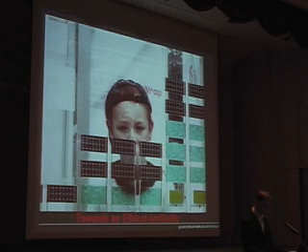Steve Kieran and I call this 'Toward an Ethical Aesthetic of Architecture,' partly because for the last 21 years, since 1984, since we've been in practice, we've been trying to find a way to work, a method of working, and a product from our work that we believe is deeply rooted in a kind of ethic. That ethic, I hope, will become clearer as you see the work.

We wrote an essay about it in the recent World Architecture, copies of which have been sent to a number of places, and it's published in China, so it's not readily available here. It is in English, not just in Mandarin. I think we may have sent a copy to your library here, and if we haven't, we will do so.

We talk a little bit about what an ethical aesthetic is in that essay and in the monograph on our work. About 4 years ago, we published a book called Manual, The Architecture of KieranTimberlake - I don't know if it's in your library - and it chronicles the first 15 years of our work, the process of that work, and the aesthetic that came from that process.

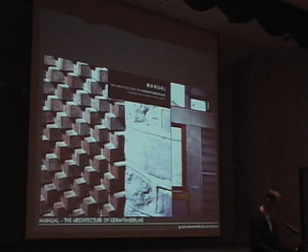We wrote it for all of you; we didn't write it for us. While there are, we think, wonderful pictures in it, it's not a big glossy book. It really talks about our process, and our process with clients and with our consultants, that allowed us to do the kinds of details and designs that are chronicled in that book.

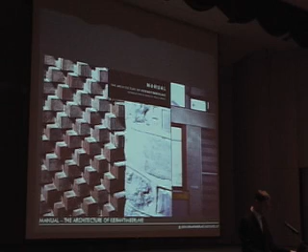There's an essay by Alberto Perez Gomez in there that we were very grateful for, and I think he talks about our craft aesthetic in there. So I was flattered to follow that little short video clip at the beginning that talks about using your hand and your mind and your eye, that you are a craftsman and then an artist.

I thought it was quite compelling. Some of our early work that's in that book, Manual, are just shown here. I'll just briefly flip through these. This is a project from 1987 done in the undercroft of a Catholic women's college, a little student center project,

a renovation. And one of the things that we tried to do when we were a small firm, we're now 54 people, when we were just Steve and me and a few other people practicing, was always look, when we got a commission, for an opportunity in that commission. It isn't always readily present to you in the commission or in what the client hands to you, particularly at that scale and at that level of aspiration of client.

But what we try to do is find an idea, find an opportunity, find a way of working and thinking that can be expressed in the work. And as we worked through different scales of projects, this was our largest project up through about 1992, a science building at Rider University in New Jersey. We always tried to bring a kind of promise of an idea and a methodology of working to these particular projects. This little pool addition to an old chicken coop that was renovated into a house in Chestnut Hill, Pennsylvania.

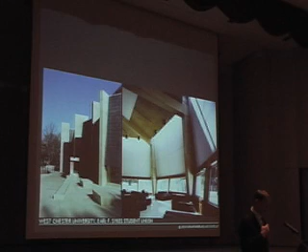And by this particular time in our career, at about the 10-year mark, we had done at least one of every kind of basic structural system, tried a variety of materialities, really looked for ways of bringing natural light and these materials together in our spaces, and used each of these projects as experiments for ourselves while trying to meet the client's objectives.

This little middle school, actually lower school gymnasium, the pods, the little window boxes on the side of the gymnasium. I don't have an interior view here, but they provide these little places of respite for lower school children, these places that are intimately scaled. They only come up to about my neck, and they're only about this wide. So two kids can kind of crawl in there and call that cubby their own without really feeling as though an adult would violate that space.

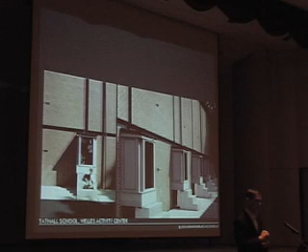And then, of course, they occupy the inside and the outside. The steps are out on the playground. So, again, they're sort of child-sized, a place that formally allows them to perch while people are occupying the playground.

A recently completed project at the University of Pennsylvania that has been, I think, widely published and you may be aware of. As we have moved throughout the next 5 to 10 years of our work, I think one of the things that we have been very interested in, and I know that Dan asked me about this, is really the idea of integrated component assemblies and the idea that you can take systems and combine them in unusual ways and really begin to have walls become mechanical systems, and lights and mechanical systems and electrical services and walls all become integrated and potentially built even on site.

In this particular case at the University of Pennsylvania, this was the first active curtain wall in the United States, a triple glazed wall with an interior chamber that is actually attached to the mechanical system of the building. Air is drawn through this wall and it becomes a tempering barrier to the outside. It also allows us to make for a much more transparent building.

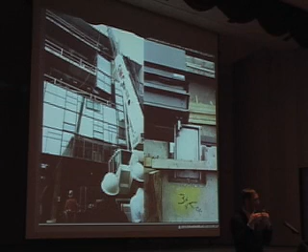And if they enter those three chambers, to the right-hand side of the unit, there's a vertical channel that allows the water to get out of those chambers. And it just allows for abundant natural light, and it allows for a very transparent structure to the outside. And of course, we're very proud of this building because of its environmental characteristics and its environmental responsibility.

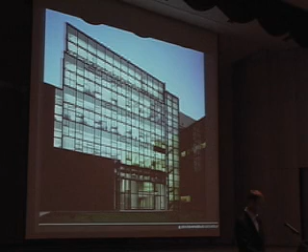This view you can't see anymore. It's now been blocked by a building designed by Todd Williams and Billie Tsien, which is under construction, and they will face one another across a courtyard. Another project that represents a tangible example of the amount of research that we do in our office. This is called SmartWrap.

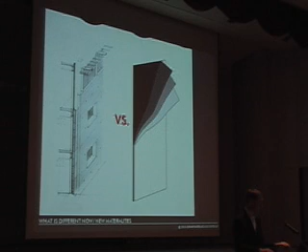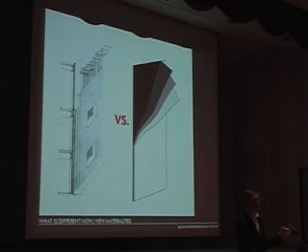This was a view of the installation at the very first Solos exhibit at the Cooper Hewitt National Design Museum in New York. And this was a speculation on the building envelope of the future. The idea that perhaps we can take an R15 wall, conventionally built out of block and steel and brick and an air chamber and insulation, and with looking at new materials, thin that up in a membrane that might have printed technologies on it that is eminently flexible, eminently replaceable, and eminently mass customizable.

And so this pavilion was a demonstration project of those first prototypes. You're looking at SmartWrap, printed wrap up above, the different colors representing the different materials on the wrap. And then this view of my son, who was then 5, looking through the wall, looking past the photovoltaics, which are the dark rectangles, the thin film batteries, which are the light green rectangles, and the OLEDs, the organic light emitting displays, which are the yellow panels.

But if you just close your eyes for a moment, and you imagine a wall all out of OLED, in other words, a wall that looks like that screen right there, it enables you to put an image up on the wall, allows me to plug my computer into that wall, and rather than going through that projector, it allows me to put the image up on that wall directly. Just like your cell phone, that little 2x2 lighted screen on your cell phone is an organic light emitting display. It emits light, emits color, emits information that comes through digitally.

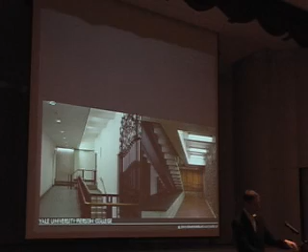You'll see the sister college in a little while called Davenport College, which is on the opposite side wall of this stairwell wall that you see on the left-hand side. The 2 colleges literally kiss one another. We renovated both and punctured that wall so you can see students moving through the 2 colleges differentially. How do we get to this level of craft? How do we pull it off in this day and age?

Well, there's a big difference, as you might imagine, between intention and realization. And this is something that you're not going to learn in architecture school. You're going to learn this when you get out into the world of practice. And not everything that you draw gets built. We were just talking about this before I began the lecture, about how buildings get executed with multiple committees and different kinds of input. And then you have to also get it constructed.

You have to work with a contractor or a CM. And those CMs and their subcontractors, hundreds if not thousands of people, are being asked to interpret the drawings that are on the left-hand side of this image into the reality that's on the right.

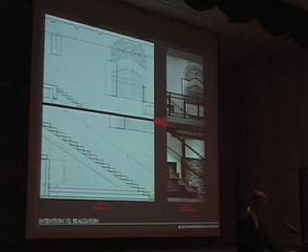And how do we get from one to the other? Well, it's a very, very arduous process, as you can imagine. And one of the things that we've tried to do is understand how one fails in this process so that you can understand how you can succeed.

Whereas in a highly controlled environment like all other non-farm industries, there's a great deal of control. They're highly productive and they get a great deal of results from them.

One other way that we're losing control of our projects is just compare these two projects right here. That science building I showed a little bit earlier, built in 1992, and a building that we renovated at Princeton University called Little Hall, that was originally built in 1899 and 1902, respectively. And just look at the building systems. Many of you are going through a building systems project right now in your studios.

Look at the building systems in 1899 and 1902 that Cope and Stewardson, the architects from Philadelphia, had to work with in that building. Basically, the HVAC system was open your window. The heating system was put a log in the fireplace. And the bathrooms didn't exist. You went down the stairs, you went outside to an outhouse that was adjacent to the residence hall. So only about 5% of the fabric of that structure had any kind of systems within it.

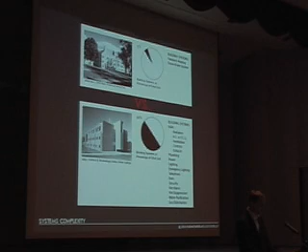So one of the concerns that we have with that is that we need to gain control of it. We need to know and understand those systems and really know and understand how those systems come together and really have a better understanding as designers and architects about those systems and what they mean.

The contract, the Personal Architectural Services of Frank Lloyd Wright, says, the architect undertakes to itemize millwork and material for the building, lets contracts for piecework, and eliminates the general contractor, where possible, by sending a qualified apprentice of the fellowship at the proper time to take charge, do the necessary shopping, and hold the whole building operation together, checking costs, layouts, etc., and endeavor to bring the work to a successful completion.

Now compare that with the AIA contract, our national professional entity that I am a fellow of. Item 2.6.6 says in the contract, the architect shall not have control. It says it in black and white, shall not have control over or charge of, and shall not be responsible for construction means, methods, techniques, sequences, or procedures, or for safety precautions.

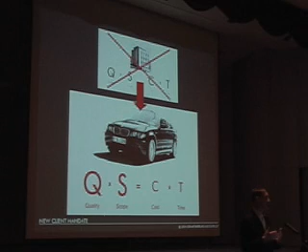It's the automobile industry and several other industries over the last decade that we chronicle in Refabricating Architecture that have really looked to an imbalanced equation here. Improving quality and increasing the amount of scope in automobiles and ships and in planes and places like that, while maintaining cost and time in the making of the product going forward. We're finding that our clients, our architecture clients, are demanding that of us as well. And so we've got even greater pressures on ourselves in terms of how we're making our work.

We have old and new legal structures, ones that cut the architect out of direct conversation between the client and the contractor, where the new models are really more linear and more seamless. So how do we get to where we want to be? Well, one of the first things that you'll do when you go into practice is really think about how you want to design your own culture.

But further, one of the things that we've been working on through our research efforts is really to think about the 4 principles. And these are taken from a variety of places. Kind of kaizen, the Japanese principle of continuous improvement. To plan, then to do or to make, to monitor what you do, and then to learn from what you do, and to continue that cycle.

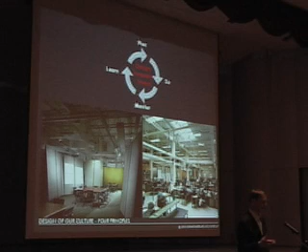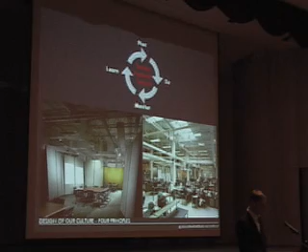And while you're doing that, to continue to design and innovate and invent while we make these things. And there's some risk involved in that, but the risk is managed through the monitoring and the learning in the process of planning and doing. We also collaborate. We also feel we have a responsibility to collaborate. In Refabricating Architecture, we talk about why we think the world of architecture is in the place that it is right at the moment.

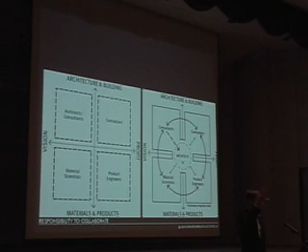The left-hand diagram here shows the separated worlds that we're currently working in. Contractors in one quadrant, architects and consultants in another, material scientists and product engineers in another, rarely collaborating, rarely speaking to one another. The world we envision is the one on the right, where architects move back to that center of control, like Brunelleschi, where they've got deep control over the process of making things,

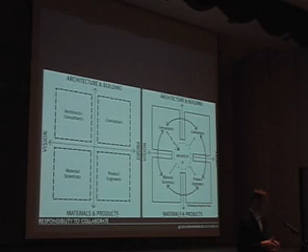the integration of systems and materials, and the consultants in the design process, so that those 50% of the systems that are in your building that aren't pure architecture design, but come from HVAC, come from MEP systems and structural systems and data and power and all those other things that we can make architecture out of, are now back in the control of what we make.

Furthermore, we've tried to practice these kinds of collaborations. In the upper left, we collaborated with Skanska and a number of other people, DuPont and ILC Dover, the maker of NASA spacesuits, on the making of the Smart Wrap project.

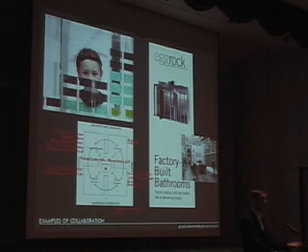We worked with a company called EggRock to make factory-built bathrooms, the prototype of which went into a project at Cornell University. And we've continually asked ourselves how to work on each and every project and redesign the collaborative model for each and every project as we move forward.

What that allows us to have is we're not master builders any longer, but we have master control. We have thousands of bits that go into projects, and we have lots of drawings that we have to do. We have lots of things that we have to coordinate, and we can't have singular control over them. We have to use collective intelligence in the making of our buildings, and that's how all of these bits and all of these pieces come together into something that we can be satisfied with when we're through with the process.

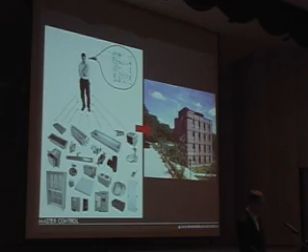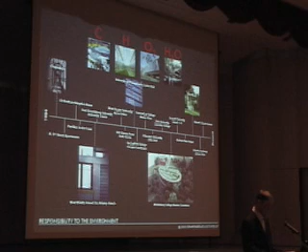And while we're doing that, one of the things that we need to do is be environmentally ethical. We need to be thinking about how our buildings come from the earth and how they're going to return to the earth, and to keep that in mind. And that's been a principle of our practice for the last 21 years.

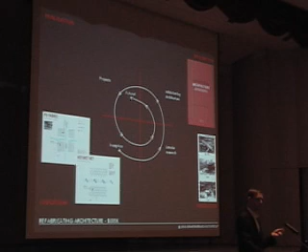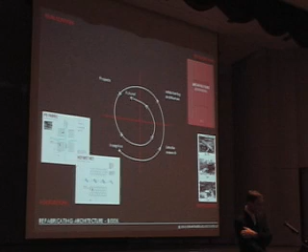The grid in the middle shows the 4 quadrants: realization, recognition, specialization, and education. Where does the project inception of something like Refabricating Architecture, our book, begin? It began in the education quadrant, because Steve Kieran and I teach at the University of Pennsylvania — we also taught at Michigan and other places. Out of those design research laboratories we've led, we started thinking about different ways of building and making things, which caused us to get grant money through the Latrobe Fellowship, a research grant through the American Institute of Architects. That instigated us to write a book, realize that book, and bring it back into the world of teaching and publication.

As you flip through the rest of these, the prefabricated bathroom models — off-site fabricated integrated component assemblies — really began from a discussion about integrated component assemblies on a very small scale, at a talk and a lecture, going through some speculation on whether we could pull off these assemblies and off-site produced modules. That led to getting hired by DuPont to actually prototype using some of their materials, some vanities and bathrooms, and then taking it through recognition and back into realization, such that these vanities are now in 4 different projects at Yale University, and off-site produced bathroom modules, plus one prototype up at Cornell University in their projects.

Off-site produced residential modules were built at Yale University. Again, the track looks a little like a hurricane track through the Gulf, beginning with a provocation by a client — the realization that they needed 32 new beds on a landlocked site in a courtyard at Yale. How were we going to build there? We couldn't get conventional constructors onto that site without airlifting material in, and they didn't have time to get it done. So we speculated on how they might do that.

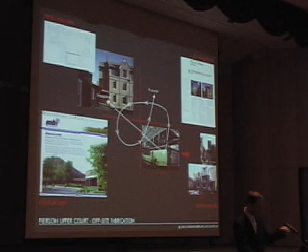We brought that out publicly. We educated ourselves and others in the process, and then it takes on other kinds of tracks — building information modeling. We're currently using Revit in our office, a building information modeling system, the next level beyond AutoCAD, the 2-dimensional drawing system.

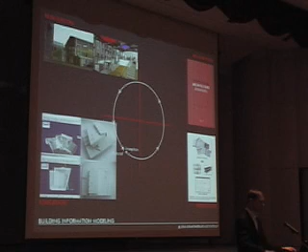We're using Gehry Technologies' Digital Project, and we use a variety of other modeling software to look at things three-dimensionally, like Rhino, Form Z, and 3D Studio Viz. We also have a three-dimensional printer in our office that allows us to print models in real time, so we can utilize those in the design process with our clients.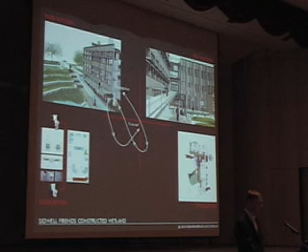Researching systems such as constructed wetlands for a middle school down in Washington, D.C. The Levine Hall active curtain wall project — again, a different kind of track of research and speculation. And then, of course, the SmartWrap project, where it begins and where it ends. These are the kinds of things that really cause us to ask ourselves questions about each and every project that comes in, set ideas and goals for those projects, and then try to track them as we move through those individual projects.

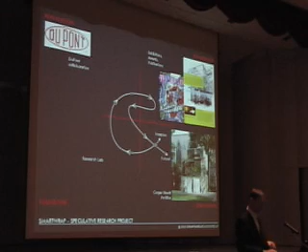And then, of course, the Loblolly House, which I'm going to show you here. It's one of the 4 projects that we feel are really beginning to change the boundaries of how not only we're thinking, but how we hope others will think. This is a completely off-site produced house. It's 2,500 square feet, for a house in Maryland. It overlooks the Chesapeake and sits amongst tall loblolly pines — very, very tall, thin pines with a kind of canopy at the top.

It sits in a wetland because it's very near the shoreline of the Chesapeake, so it has to be up on stilts. What you see in the left-hand plan is a diagram of pilings where the cars can pull underneath the platform, which pushes the building up on stilts.

You enter through a walkway over a constructed impluvium that runs through the house. You walk across that walkway and up the stair on the right-hand side of the plan, arriving at the first level above grade, which is actually a master bedroom and a child's bedroom, separated by that impluvium.

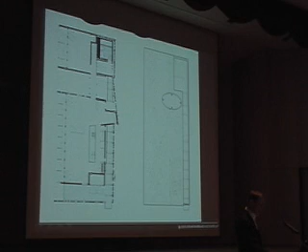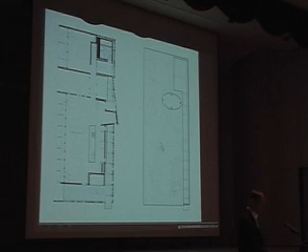You come up the stairs, enter, and get into the bedrooms through the portal, or continue up a stair that takes you to the next level, onto the living room, dining, kitchen level, with another study and bath on the upper level. There's a green roof on top of the house, which I'll talk about in a minute.

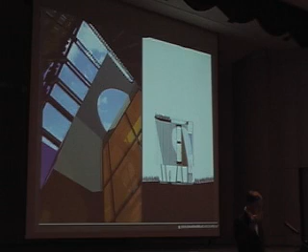This is a view of those pilings as you enter the house, coming under the cover of the house overhead, up through the stairwell, past the impluvium, open to the sky. A view through that impluvium, that rainwater capture point in the house, is part of the sustainability agenda of that house.

A view from one of the bedrooms, looking out through a triple-glazed wall, part of which is a NanaWall system that opens out to the Chesapeake with screening windows and storms, so it can be buttoned up during the winter. It'll have expansive views to the south and to the east.

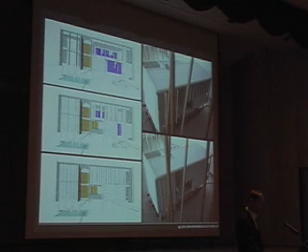These are three views on the left-hand side showing three-dimensional models done in Revit, which integrate all the components in one drawing of that house, showing the systems opening and closing. And two of the models were sent to a 3D printer, again with the systems open and closed on the site.

Now this is where I want to spend a little time. This is an exploded view of all the components in that house, and all of them are off-site constructed. The only thing we're building on the site—we have to bring a pile driver on a barge, float it in, and drive the piles on site—is really the only way we're touching that site.

The road already exists, but we wanted to disturb those sites as little as possible, so all the rest of this material is going to get trucked or barged to the site. The frame is a Bosch Rexroth extruded aluminum frame, like you saw in the SmartWrap Pavilion in New York—that's this piece at the core of the diagram in the center.

The floor systems are custom-designed cartridges which include mechanical, data, and electrical systems in a wood structure, being built by Bensonwood. The wall systems are also being built by them, and the exterior window systems on either side are being provided by yet another supplier.

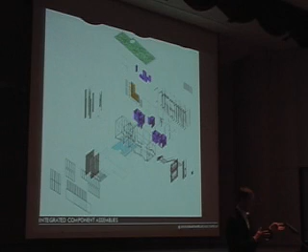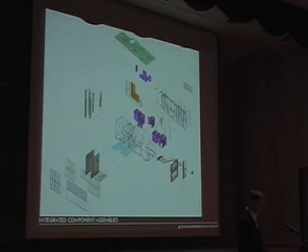The green roof is being grown off site in trays—which Frank Lloyd Wright actually did copper trays for at Fallingwater. These are coming in PET trays grown off site and then lifted onto the roof. All of these systems come together in about 3.5 weeks over the course of a month in June.

And this is ultimately a view from the Chesapeake that you'll see of that particular house.

One of the things we believe, both in integrating component assemblies and in off-site producing work, is really to try and figure out a way to get an environmentally ethical architecture where we touch the site a little less stridently than when we're building on site for 16 to 18 months, while also being able to control the waste streams in the product delivery methodologies of building.

Because by doing it in a manufacturing setting, we're not just throwing that stuff in a dumpster. Nearly 25 to 35% of all brand new materials that come to a new construction site end up in a waste stream in a dumpster on a project. Architecture is immensely wasteful, folks, and we need to do something about that. We think one of the ways we can do that is by designing a system and a way of working with contractors by building a system.

We've actually tracked through this whole supply chain to this particular house and who the assemblers are, and how that's all going to come together, logistically working with them on scheduling so that these things come in real time and just-in-time delivery, so nobody's sitting around waiting. It'll come together like we expect a car to come together.

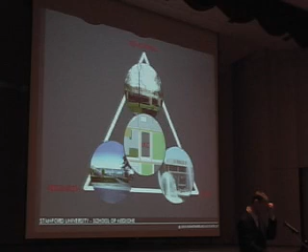The next project is one we recently completed that we very much hope will be a commission of ours, at Stanford University for the School of Medicine. Oftentimes the program brief a client gives you looks a little bit like this. This is our diagram, our interpretation of their program.

Basically, what the dean of the School of Medicine asked us to do was look at how medicine can translate, he used that word, the ability to understand medicine from the education process, from their research process, and from their care process, all through the aegis of redesigning an educational system that was going to be manifested in a new building on the Stanford University landscape.

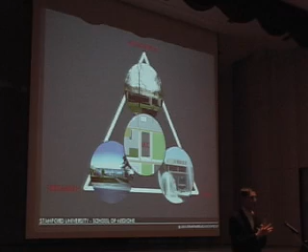That whole idea of translational learning or translational knowledge is really about inverting the process of how we learn—basically turning a building inside out. It's not housing students in opaque rooms and closeting them away, but in this case getting paths of travel from the hospital, from the School of Medicine, from the research elements, all crossing paths with one another through a kind of core element, a building they wanted to put on the campus. Now the campus, if anybody's been to Stanford, is quite beautiful. It's in Palo Alto, California.

It was loosely based upon, I think, Corbusier's Venice Hospital proposal—a series of interconnected walkways and courtyards gridded out in a Cartesian way, with open and closed spaces all interconnected visually by a system of walkways. That was again a loose interpretation of that inner quad diagram, if you track it back, sort of Durell Stone's idea about how the inner quad was really made up.

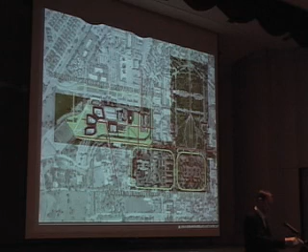And then a brand new building by Norman Foster, right here, which is actually a kind of precursor to what we think the Learning Knowledge Center ought to be—it brings the landscape directly in from the outside, into that hourglass-shaped courtyard, which you can't see very well in the diagram, but brings it inside, turning the building transparently inside out. So the inside is very transparent while the outside retains all of Stanford's terracotta and sandstone coloration.

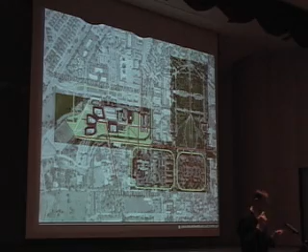So our initial speculations on this really looked at how we might introduce a relationship between landscape, inside, and outside, and explored ways of organizing the building through a series of flat plates and trays.

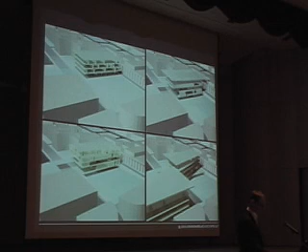And these are four examples, four options that we showed in an initial meeting with them: a series of flat plates and trays with kind of mutable, changeable inside walls that reach out, back out into the landscape and connect inside and outside through great deals of transparency, abundant natural light, and other shading devices.

In order to convince them during the presentation phase of this that we knew Stanford University and we understood the kind of characteristics that really make up Stanford University and then make up our building, these next two slides track through what we call the DNA of Stanford. Across the top is the core campus, the original academic campus, the loggia, the portal, what we call the ombra, the Italian word for shade, and the material color.

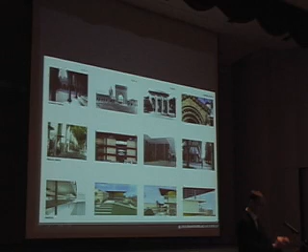The medical campus, the kind of translation of that on the medical campus, and then what our building did with those kinds of elements. And we did that with the courtyard, the loggia, the grove, and the comment that I said about the inside-outside relationship with the spaces there.

Rather than being in the Northeast or in the Midwest, where climate changes are rather extreme, it just gets hotter in California from about 52 degrees all the way up to occasionally in Stanford around 100 degrees. And so groves of trees and shading areas and outdoor courtyards that are naturally ventilated are very much a part of the making of the spaces.

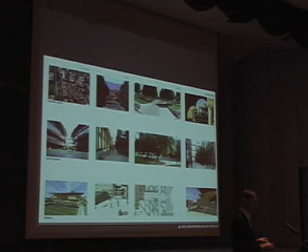Then we tracked through a series of their existing pathways, open spaces, road networks, and so forth. And then took those diagrams down through the master plan that had been prepared for them. And then we showed them how we were adjusting that master plan into our own speculation on the lower tier there. And this is the plan that we presented to them.

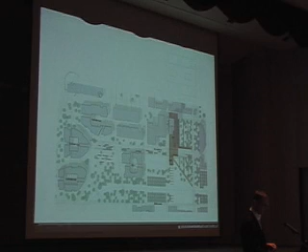This walkway, the Via Medica, right through the middle here, I lost my arrow, right through here, got you to enter at the ground level. And then this sloping lawn brings you up to the second level. So now we have a true crossroads. We have pathways going down, going across, and going up. And this building then is also driven deeply into the Edward Durell Stone building up here, through connections at the lowest level and at the second level as well.

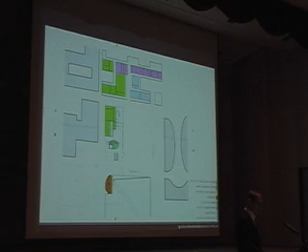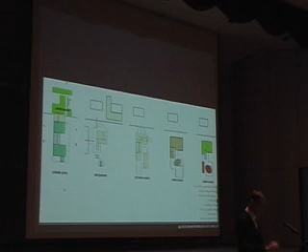Now I won't take you into all the program, but the program shows these connections and these relationships between connections to existing buildings and how we would go ahead and make those spaces, and then how the circulation of these spaces would wrap around essentially the outside of these interior closed spaces that are open to the outside, that are brought inside to outside, so to speak.

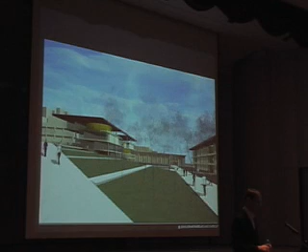So here you're standing at the campus drive at a major crossroads between Serra Mall and what's called Via Ortega, which is this path leading up the right-hand side toward the Edward Durell Stone building. On the right side is our image of Foster's Clark Center building. The Durell Stone building is in the back distance, and we drove a portal into the Durell Stone building, so that walk goes right into there, and that's where we would have located the dean's office.

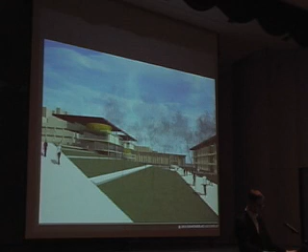And then the Learning Knowledge Center is the building you see, a series of trays with a very large roof shading device and an open courtyard cutting it to the left-hand side. That raised lawn is over a vivarium; there's a building below this raised lawn that exists. And the way we would build that raised lawn up is basically through lightweight foam, building an understory, and then 3 feet of soil, which is stabilized, and sides, or a retaining wall on the left-hand side here.

We're working with Hargreaves Associates on this particular landscape. And so this walk takes you up to the upper level entry, which takes you into the second floor, which gets you over to Beckman, the building on the left, and back into the Edward Durell Stone building on the right. And then you begin to have this exposure of these learning knowledge centers, which are highly computerized

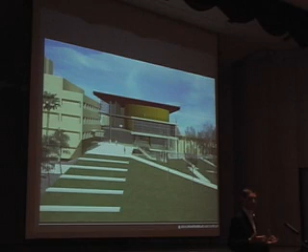learning environments that are free-form, highly mutable spaces, but need controlled light, separated by these more transparent spaces that can be classrooms, meeting spaces, and other kinds of spaces as well. See the connection in the right-hand Durell Stone building.

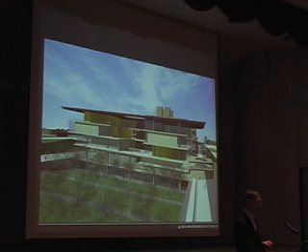Here you see the sloping landscape going down to the conference center, and then the open tray of space that kind of cleaves the building above the second level into an open courtyard on the upper level. So the building gets progressively open as it opens up.

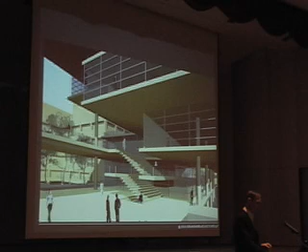This is the major connection between lowest level, main level, and upper level, a major public stair that's outdoors and open, and a walkway that takes you across the Edward Durell Stone building and a kind of low shed that walks across the building. And then the learning environment, this is called the Exploratorium, not our work, which is a series

of interactive spaces where scientists, researchers, medical people, and students and faculty alike can come together and work collaboratively in the ground floor environment, but it's also a place where visitors can understand what the School of Medicine and the hospital and the Research Institute are also all about as well.

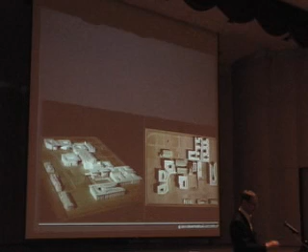The model that we produced basically shows three-dimensionally the first, the Learning Knowledge Center here and the landscape around this, the first school of the Institute of Medicine building, which would replace a building that gets taken out here, which I'm not showing you. And then our addition of the Institute buildings later on, which complete the building.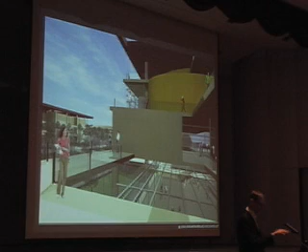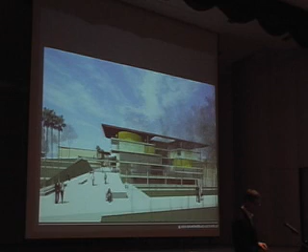This is a view at the upper level looking down into the Exploratorium and kind of that upper level courtyard, which allows light to drop down into that space, and views out into the Stanford landscape. And then a view at Via Ortega and Via Medica showing this Institute of Medicine building further down in the distance, the raised landscape and the interconnection visually and extended through by these landscape groups that would draw through the building.

Now let me show you two things that we've built in detail, just to kind of show you a broad range of the kinds of work that we do, and how the language gets drawn across very, very different kinds of buildings. We've done 5 different college renovations at Yale, which is divided up into colleges.

They're residential colleges. You live, you eat, you do some study in those residential colleges. You get general classroom and other graduate school work in the graduate schools. And so people leave these spaces and then come back to these spaces on a daily basis. And they're roughly housing somewhere between 350 and 500 students in these colleges.

And these colleges, the majority of them were built starting in about 1927 and finishing in about 1937. 5 of the 7 of them were designed by James Gamble Rogers in a very kind of eclectic style, from collegiate Gothic, very heavy stone buildings, through these lighter, thinner Georgian brick red and white buildings. And we've done them all. We've renovated all of them.

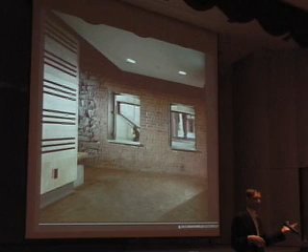And this is a place where you also get to reveal one college against another college. We made these punctures through a common basement wall and a common stairwell wall. It still had to be fire separated by code, but it allows for the living that is going on in Pierson College to be now shared and exchanged with the living that's going on at Davenport College.

The two stairs go by one another like this. They crisscross on either side of the wall like this. They don't go parallel to one another, but they cross one another, and you look through these portals, you can actually see students and faculty moving by one another. And here you can see one of those portals through the Davenport stair, looking into the Pierson stair, with somebody coming down that stairwell on the other side.

And you can see, we don't replicate their history in the Davenport history either. That history of that new insertion, that stair, was a different language appropriate for Pierson, and the language and refinement of that language for Davenport is completely different. And here you see those portals looking through one stair and another, and the craft, the detail of those insertions.

The other thing that we uncovered was a series of things like plaques, historical plaques, dedication plaques, and so forth that were in odd places. And one of the things that we did was put them in places purposeful to students, so that they can remember the history of the place, very much as part of the college and university experience, and put it in places that become meaningful to them.

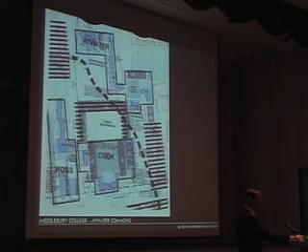And then the major dotted line is a major campus path going from the new Science Center up at the upper left to the main campus on the lower right. And one of the things that we do in these projects is really speculate on a variety of circumstances and strategies. And in this particular case, we came up with about 25 different strategies about how you can array the buildings on this particular site.

From stringing them along, such as this one up here that tried to tie the existing dining hall into the process and took the 2 residence halls and put them essentially like a string of pearls along a kind of path, but it never really engaged the landscape in any kind of way, never really made a common space, to the one that we ultimately designed and built, that took 2 linear buildings and kind of staggered them, making a kind of Vermont green, and then placing a very special building outside of that context as the dining hall and common space. So here you see the existing plan, here with this rectilinear quadrant.

Well, the master planners just suggested that we stick a simple bar building across the back edge of that quadrant and call it a day. And half of the students would have faced in toward the college, and half of the students would have faced out of the college, and neither of them would have had an understanding of what went on with the other. Whereas all the other buildings look into the college and out of the college, and all the students participate both ways.

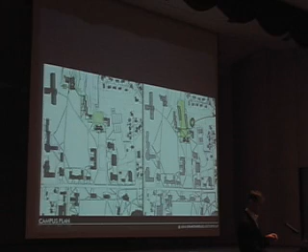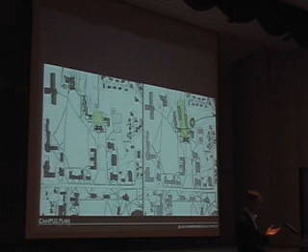Atwater Commons landscape. And the Edward Larrabee Barnes building, which echelons down the hill in a linear fashion, and the centrality of that chateau building right here, and the irregularly shaped L-shaped space of the smaller building, then were drawn together through a path that went out to the master's house, through the landscape, and through our dining hall, tying this landscape all together. And what we suggested to the college is that they basically turn this building into a different kind of program space that would no longer be common spaces anymore, which they agreed to do.

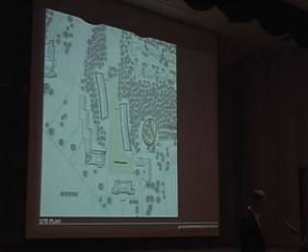So this is a larger diagram of that plan, showing how those buildings basically follow the two ridge lines, framing this rift in the valley. The topo is high in the center of this, falling away toward the north, or toward the top of the plan diagram. And then this elliptical dining hall that has a green roof, a planted roof on it, that has a cut, a rift in it, that is intrinsically connected into the landscape and out to the master's house.

So here it is finished. These are stone buildings. I'll talk a little bit about the stone in a moment. But these two buildings have a slight bend in them that follows the rift. And they're slightly staggered from one another so that students don't look in each other's rooms. The stacks on the front and the back are for natural ventilation. These buildings are not air conditioned. Those stacks, which would have been used for fireplaces in buildings on campus, are now used to ventilate the structure entirely. We work with air on this particular project.

And then each of the entries, these vertically organized entries, have a canopy, a bench, and a portal that you enter, off the major campus green, looking south. This is what it looks like from the science building, looking into the Vermont landscape. You can see the Edward Larrabee Barnes building, a series of gable roof buildings that step down in the landscape. Ours slide out in the landscape and gain that extra story at the end.

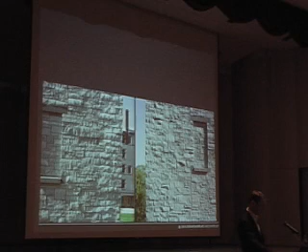And then the stonework came from Lake Huron, on the front side of the building, which you see in the quoin on the right-hand edge of the left image. That whiter stone is a limestone that was hand-dressed. And then the grayer stone is a recycled granite stone that was crafted on site. We had the stonemasons actually lay up a series of uncoursed sample walls, and we approved that sample wall with them.

But these are discarded gravestones. They are granite headstones that are made for the federal cemetery program for World War II and Korean War veterans and so forth, Vietnam veterans. But they're discarded. They've made a mistake in the name or the date or in the religious symbol that goes on that particular headstone, and they've had to discard the headstone

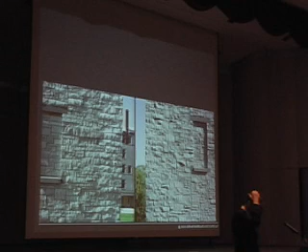after carving it. So we bought all of those headstones and have used them inside out, turned them inside, and made this rubble wall out of them. So the buildings used recycled materials and naturally harvested materials throughout as part of Middlebury's agenda for these buildings. These are blind windows here to relieve some of the ends of the facade.

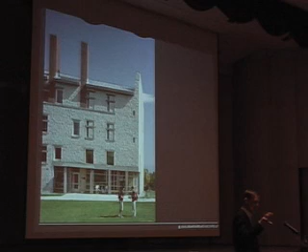Here's the edge of the rock outcropping, and the building bending against that on the bedroom side of the structure. A more frontal view of the portal leading into one of the common spaces, and then into the vertical entries, showing the window pattern.

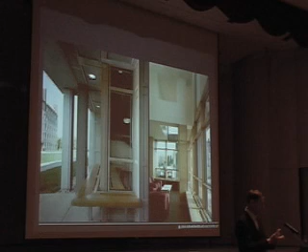The inside space of the library has a ceiling that fractures the acoustics in that space, makes it a quieter space, and is unusually lit. And then the dining hall, which is an elliptically shaped building, has a large stairwell and fireplace component, which kind of anchors it to its place. The lower level and one of the acoustical walls of the building are Gabion walls. They're wire cages filled with rock that was blasted out of the site.

The dining space: the kitchen is downstairs, and the servery is upstairs with the dining hall. The dining hall is essentially one big open space that moves from about 8 feet high at the entry to about 21 feet high at its highest tip in this elevation here. And the curtain wall is a Duratherm curtain wall, a wood wall that is pleated. It moves and travels. It is kind of agitated, so it's not a smooth wall, but has a lot of fractures to it that were designed three-dimensionally.

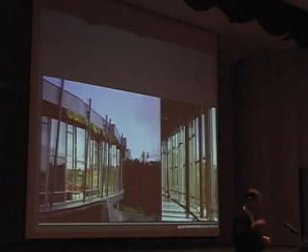And the combination of that wall and the exterior colonnettes and the interior columns, and then the larger columns that hold up the roof on the inside of the dining hall, all form a kind of forest of structure that is an extension of the landscape to the outside of this panoramic window. This is a view from the servery, looking back at those major structural columns, then out toward the exterior columns of the window wall and out into the landscape.

A view to, excuse me, the portal entry. We have these skylight cones that come into the space that expand the cone. The skylights themselves are only about 4 feet in diameter, but they expand to be roughly about 8 feet in diameter. And they're painted with a very bright color. So you always have a sense of light coming into the space, and then a kind of detail of that exterior wall.